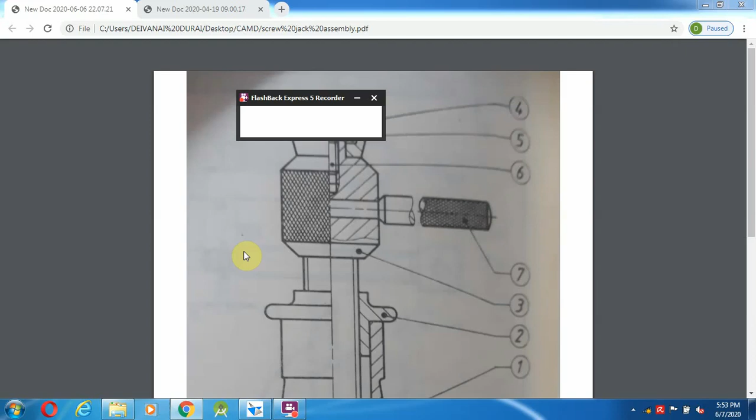So in this video we are going to discuss about the screw jack. This is the screw jack assembly diagram.

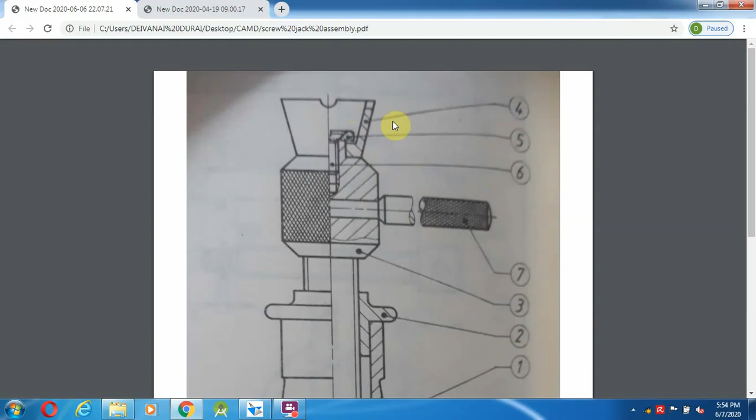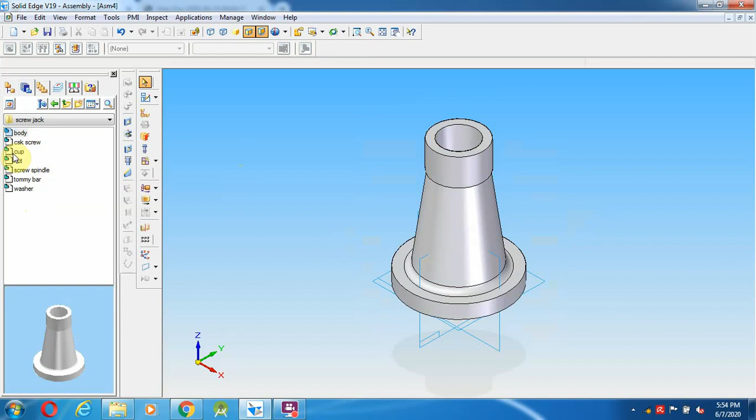So first I am going to select assemble, retrieve the file from desktop, and bring the file from the screw jack folder. I am going to bring the body part. After bringing the body part, above it I am going to place the nut. Select assemble, the bottom of this part has to be placed over here.

So I am going to align first, then give the axial alignment, this as well as this, so it has to be fixed. Then goes to the next one.

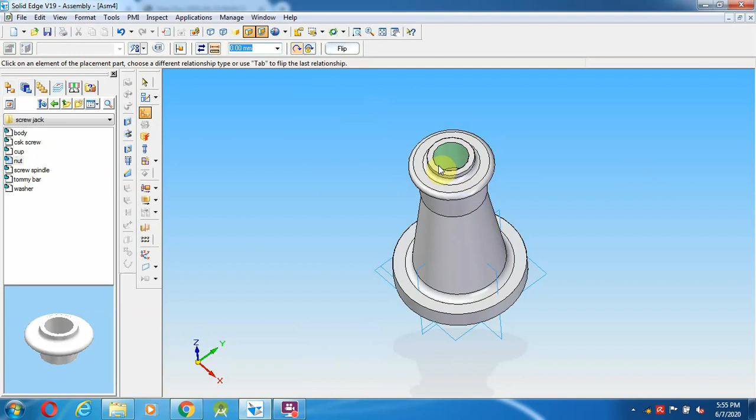Above this, the screw spindle has to be placed over here. Same concept, from the top surface, rotate this in the top surface and place this one.

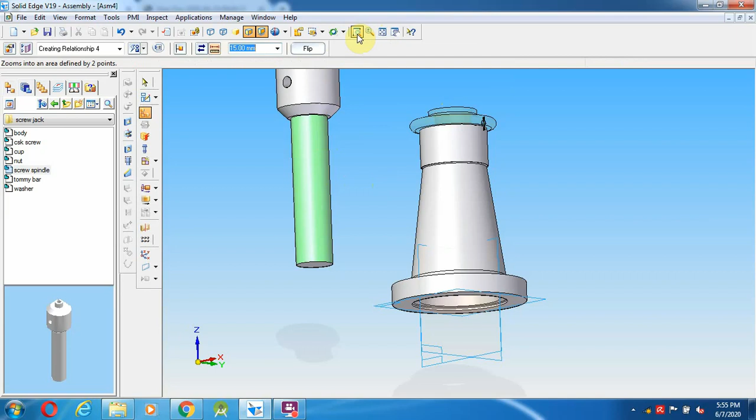Now this screw spindle may move up and down, so I am going to give it a certain distance, some 15 mm. You can place it even above this too, it's not an issue. I am going to give the axial alignment, this as well as this one.

After that I am going to bring the cup and place it above the screw spindle. The bottom has to be placed, align the axis, fit, and this has to be placed over here.

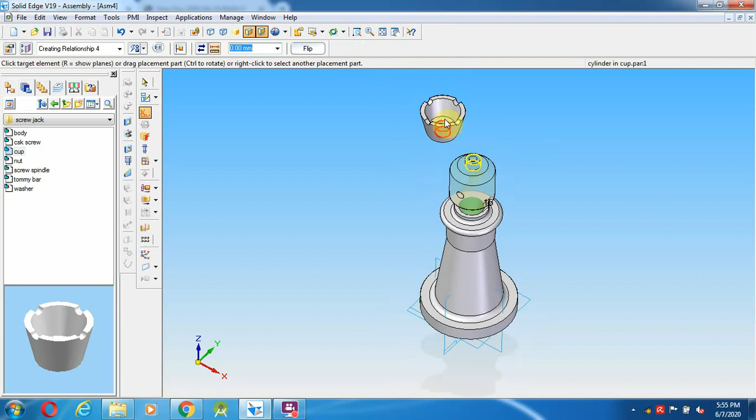Now inside that I am going to place the washer and CSK screw. I am going to do the sub-assembly over here, because inside it's very difficult to choose the part, so I am doing these things here, this as well as inside. Selecting the correct thing is very important.

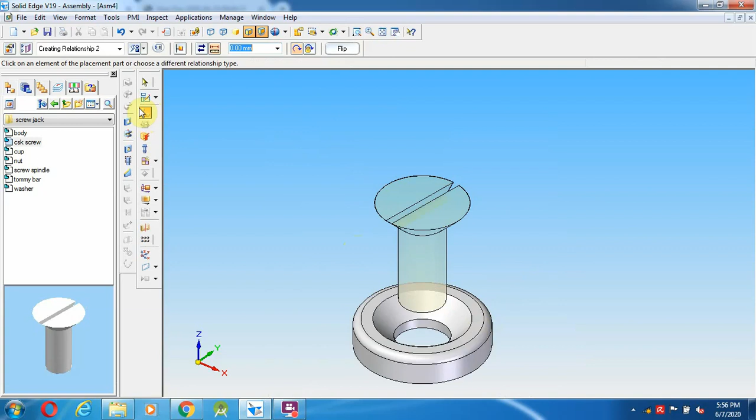Select assemble, top of this it has to be placed over here. Give fit. After giving the fit, I am going to rotate. Select assemble.

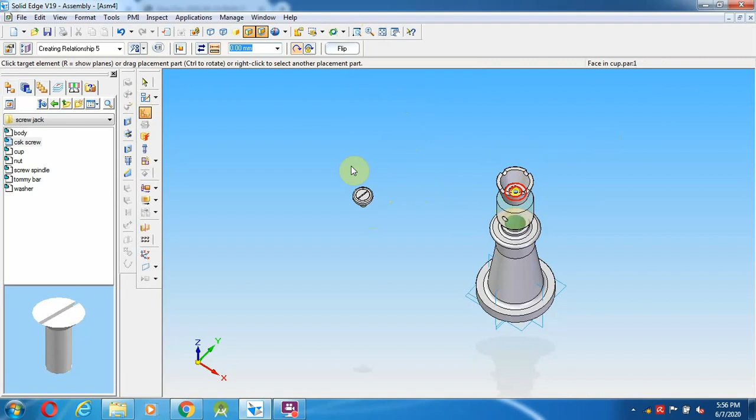First I am going to select the top of that particular screw spindle, then select the bottom of this washer. Once it is aligned, I am going to rotate again. Now axial alignment, the cylindrical one here, even this can be selected, it has to be aligned over here. After aligning this, all the thing is very simple, but there is one certain concept you have to remember while fixing the Tommy bar.

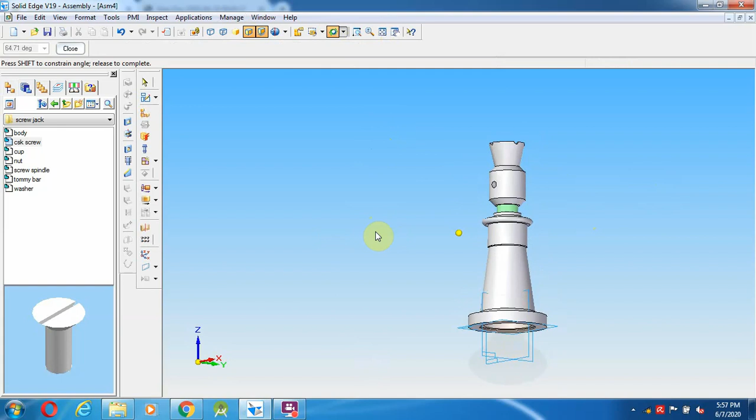So select the Tommy bar, going to rotate, select assemble, this axial alignment, and flip to the other side.

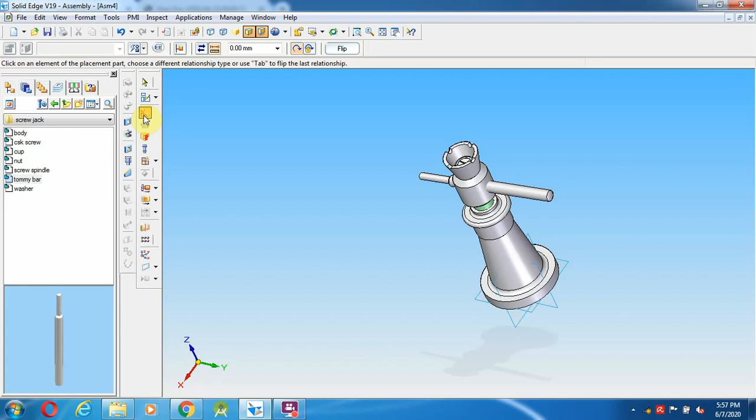Now going to select this particular one into this particular hole. This hole is not selecting, so going to do undo.

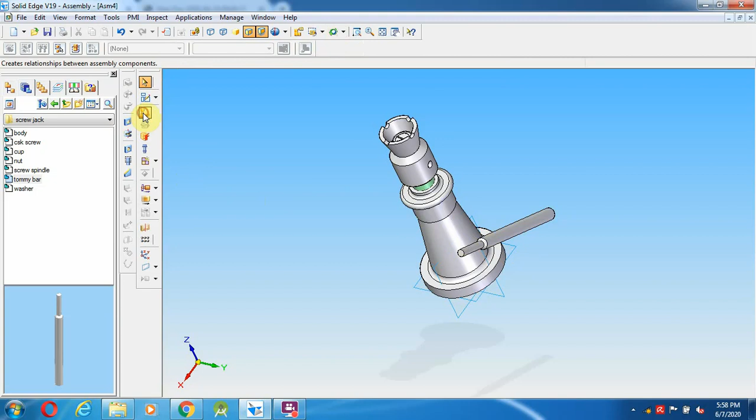First going to try this one as well as this particular hole, or otherwise for the Tommy bar I am going to select assemble Tommy bar and go here to show the relationship. I am tying this relationship. First I am going to rotate where it is coming over here, exactly this end.

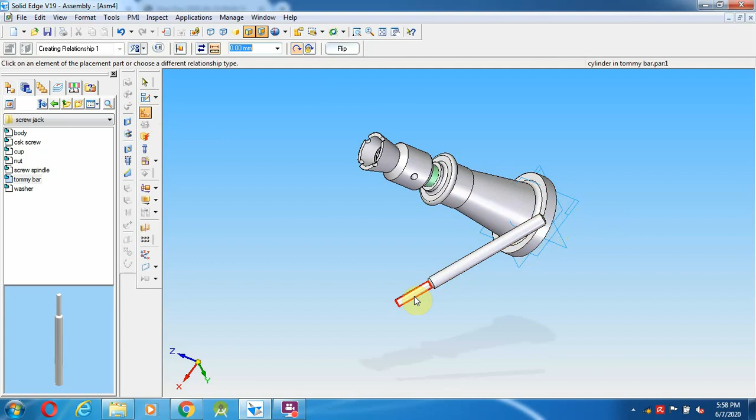I am going to select assemble for the Tommy bar relation, creating this one, and I am going to select the plane, but it's not selecting over here because we only created this particular thing. So select this assemble.

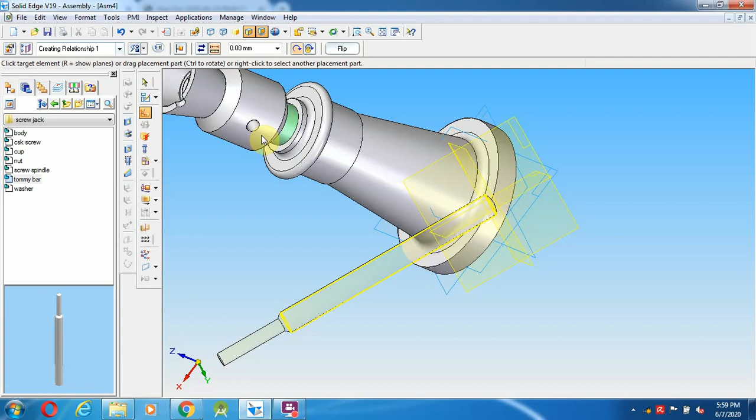So this as well as create this relationship, even here going to select this as well as this hole, it's not selected, so fit.

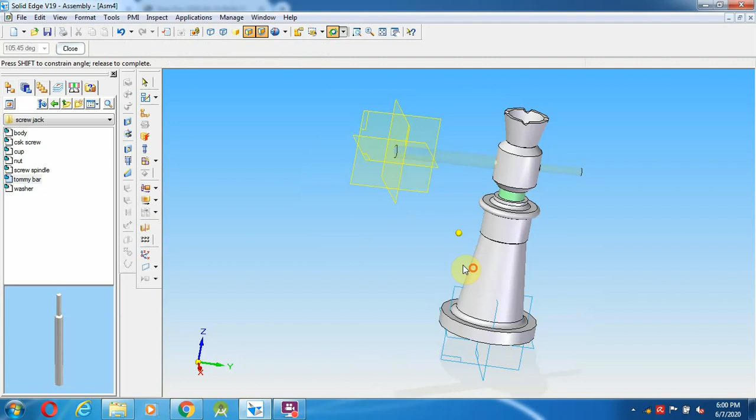Otherwise I am going to do one more thing, move the part so it has to be moved over here. I am going to try to fix it exactly at the end, almost it has to be fixed. Like this way we can assemble over this Tommy bar.

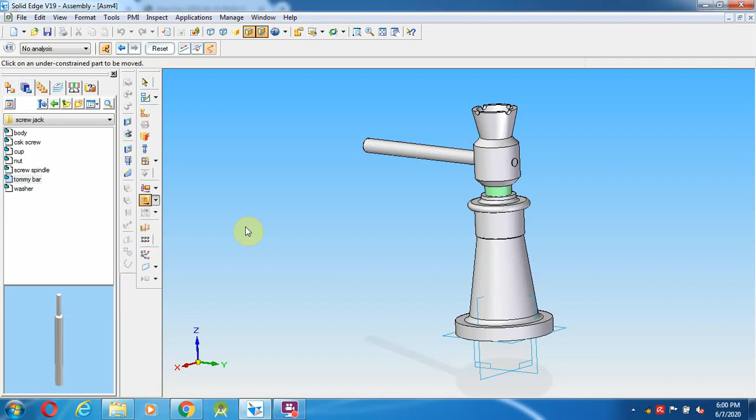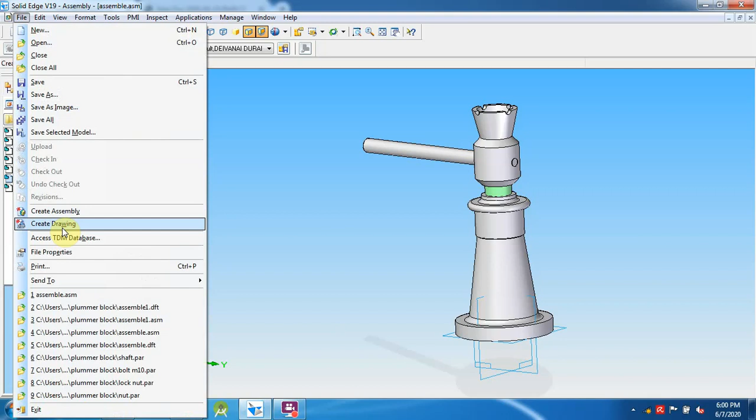Then we can save this, I am going to save it in the desktop as screw jack assemble, and go to save. After saving this, go to converting into the 2D view, create drawing, next front custom.

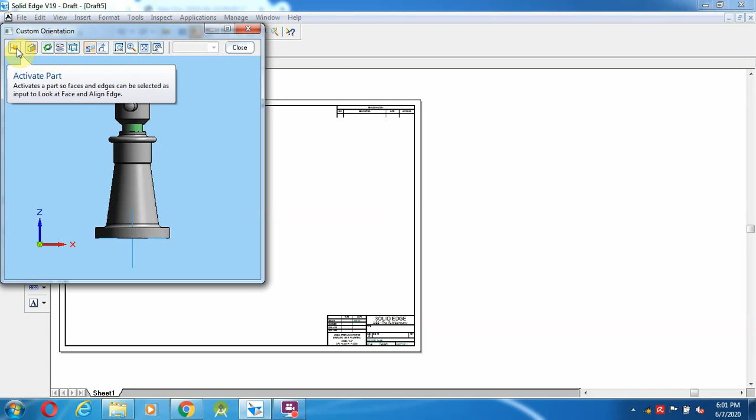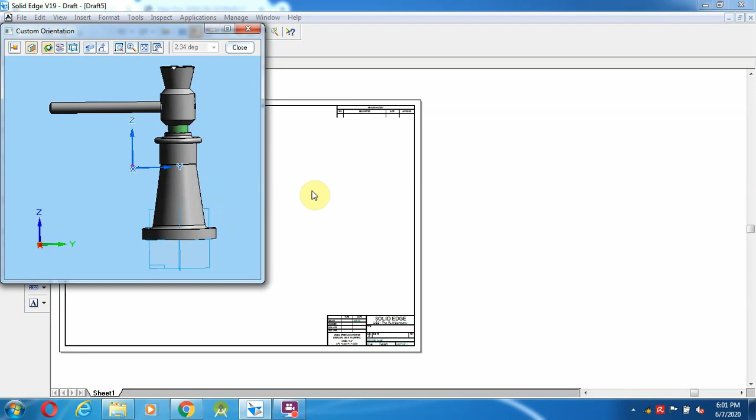So now I am going to turn this into the other side to check if anything else is there, turning it manually. So almost it looks like a front view. Close on top side, and this one like a trimetric view, isometric view I am going to place over here.

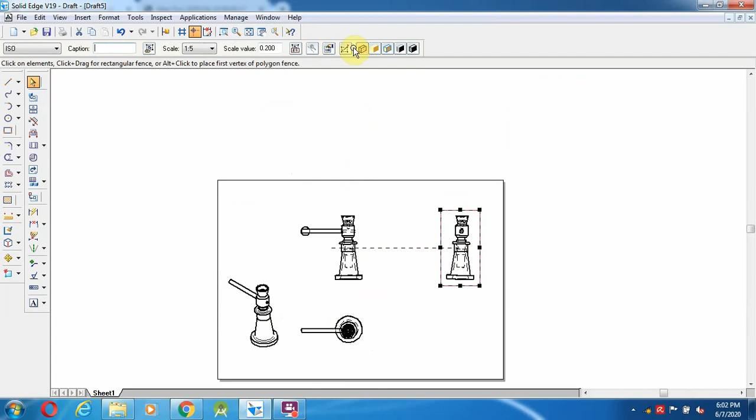Then I am going to change the sheet setup into the A4 size sheet, show background off, give OK and fit. I am going to place this one in this spot. Once I move the top view, along with that it's moving over here, so the relationship won't change over here. Once after done these things, I want to create the sectional front view.

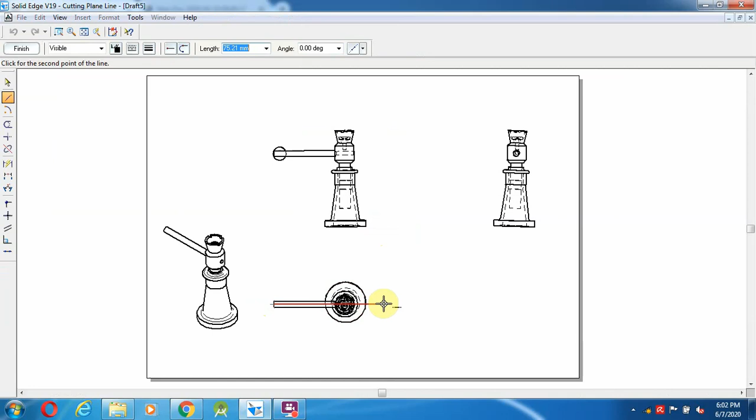To create the sectional front view, I need to create a cutting plane in the top view. So select top view, from here to the mid one, exactly in the mid one I am going to draw a line and finish, either this side. Then go to the section view, select the thing, I am going to place here, so the sectional front view has to be created over here.

After creating this, come to this screw jack, go and select this particular part, the solid part, come over here, right click, update view. So this has to be updated over here. Like this way we have converted it into 2D view.

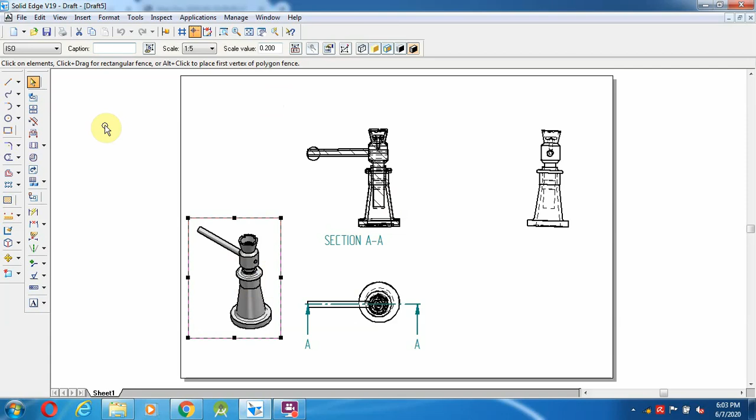So here these are all the 2D views, and the isometric we have converted into 3D view. In the final sheet we have to provide both the 3D view as well as the 2D views. So this we can save as, and with that the assembly gets over. We're going to stop over this. Thank you.